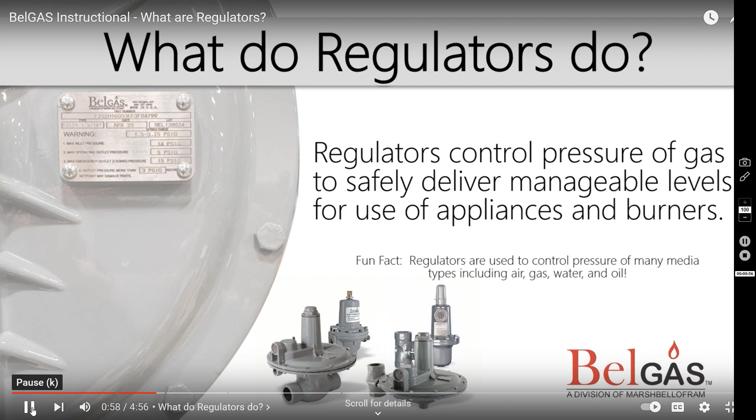Where can you find regulators? There are regulators everywhere. You can find them at the doctor's office, the cafe, and even the grocery store. Regulators are typically found within proximity of meters and other metering or regulation equipment.

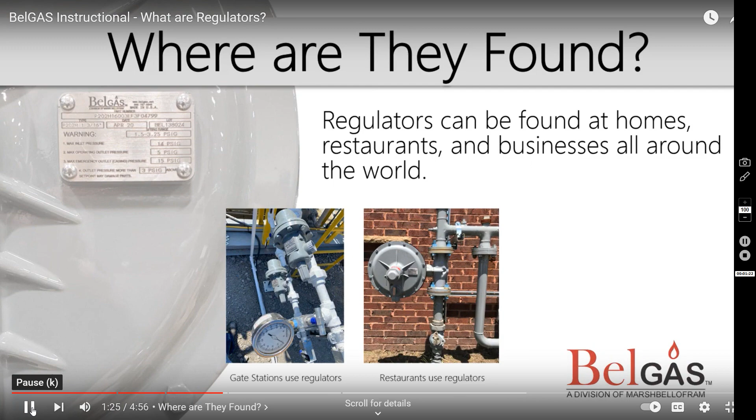Let's talk about the different types of regulators. Regulators can generally be categorized into two different types: pressure reducing and pressure relieving. Pressure reducing regulators create differential or pressure reduction in the pipeline. Pressure relieving regulators reduce the pressure in the pipeline by redirecting the higher pressure out of the pipeline.

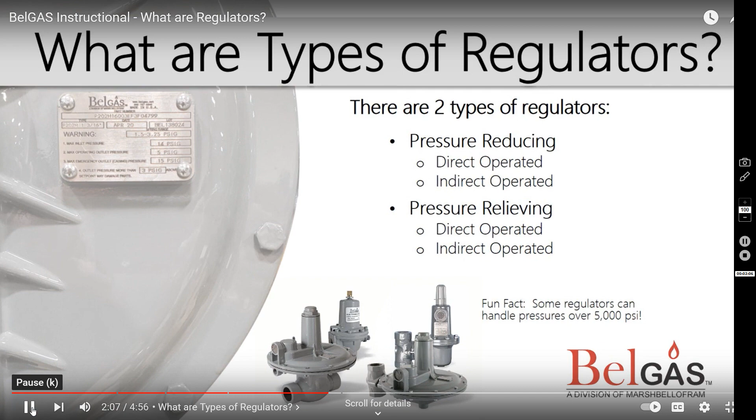Both pressure reducing and pressure relieving regulators can operate as standalone units, which can be referred to as direct operated, or can be externally controlled by another device, which can be referred to as indirect operated. The supplemental devices in an indirect regulator can help the regulator more accurately operate within the necessary flow and pressure parameters. Next, let's review some key parts of a regulator and their functions.

We'll review 9 key regulator components as represented in the cross-section drawing. The bonnet cap is a seal to the spring case of the regulator. It can be used as a tamper-proof seal and is sometimes used as a visual color indication of delivery pressure rating.

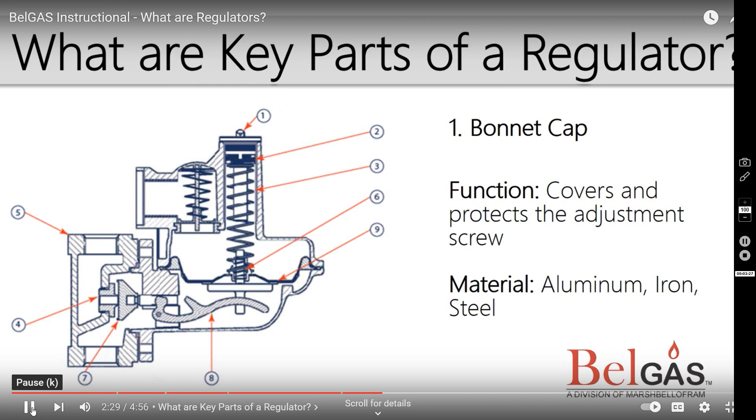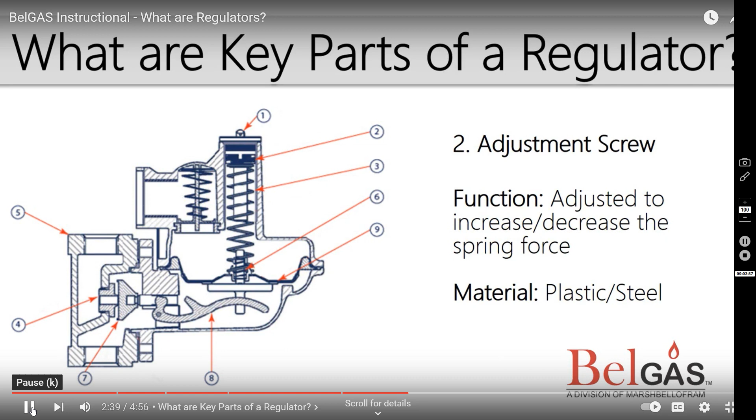The adjustment screw is the user interface to manipulate the exerted spring force. Its linear travel compresses the spring, then holds it in place when the desired pressure is achieved. The spring is the force-generating element which balances the downstream pressure on the opposite side of the diaphragm.

The orifice is the restricting element that helps fine-tune the size of the regulator in relation to the application conditions. The regulator body is the physical connection point of the regulator to the pipeline. There is typically an inlet, where the high pressure comes in, and an outlet, where the lower pressure goes out.

The internal relief is effectively a pressure-relieving regulator built within a pressure-reducing regulator. It is a backup safety device in the event of a problem with the regulator's operation.

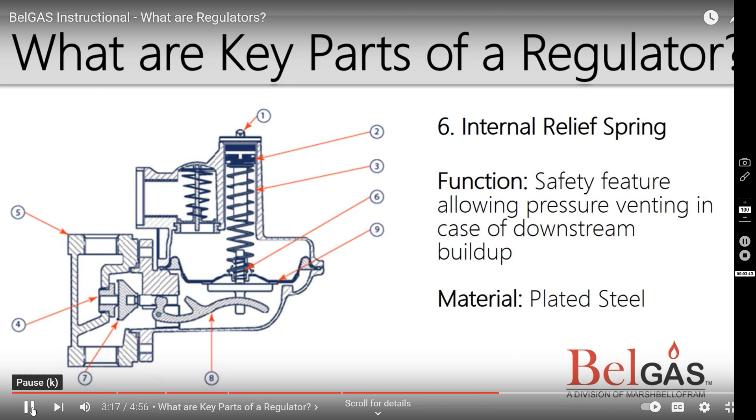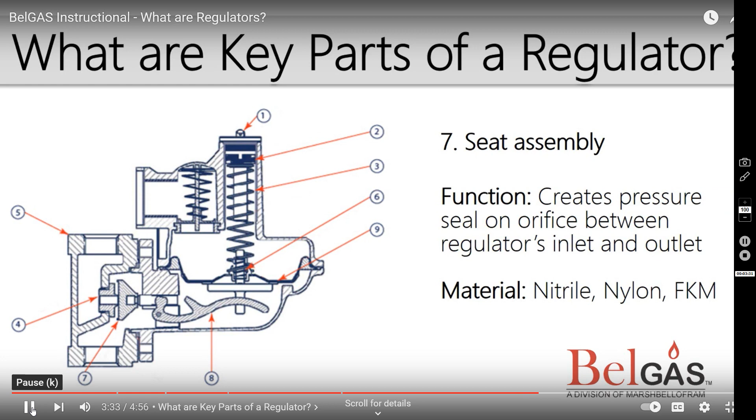The seat pairs with the orifice to close the regulator. When the seat moves away from the orifice, flow and pressure increase. When the seat moves closer to the orifice, the flow and pressure decrease until full closure or shutoff of flow, which is also referred to as lockup.

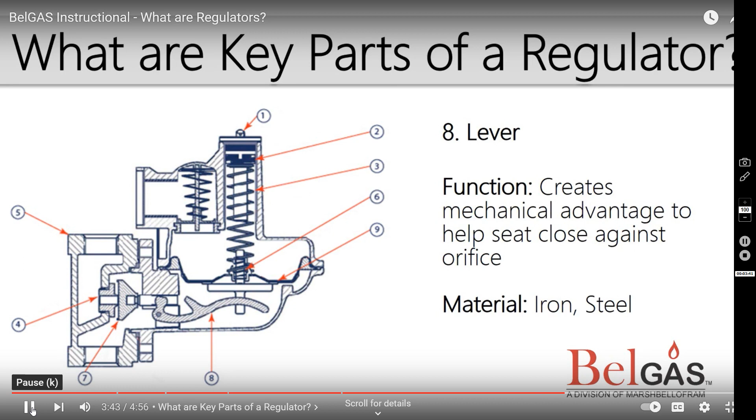The lever is the link between the diaphragm plate and the seat, which allows modulating downstream pressure to move the seat towards or away from the orifice.

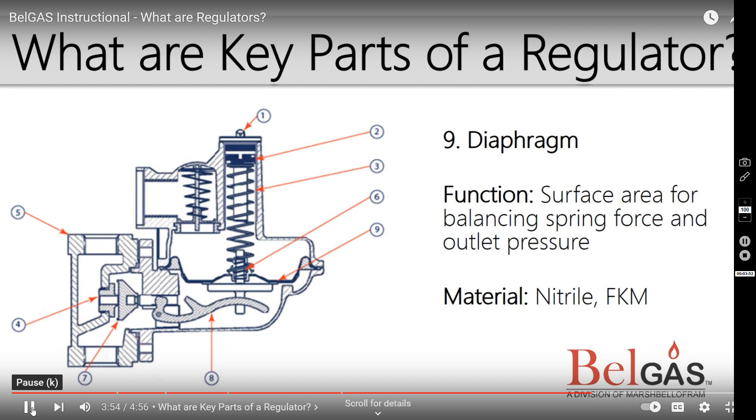The diaphragm is the balancing point between the downstream pressure and the spring force. It has a large surface area to create the most efficient balance of these opposing forces.

Why are regulators important? Regulators are critical safety devices that are used to create usable pressure conditions in many industries around the world. They are important for a variety of application styles, including industrial, commercial, and residential.

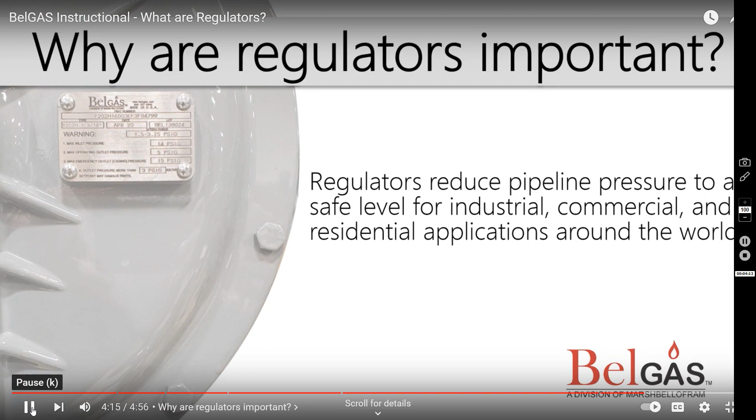Next time you walk into a restaurant, office, or your home if you have natural gas service, remember that a regulator is nearby, keeping you safe.